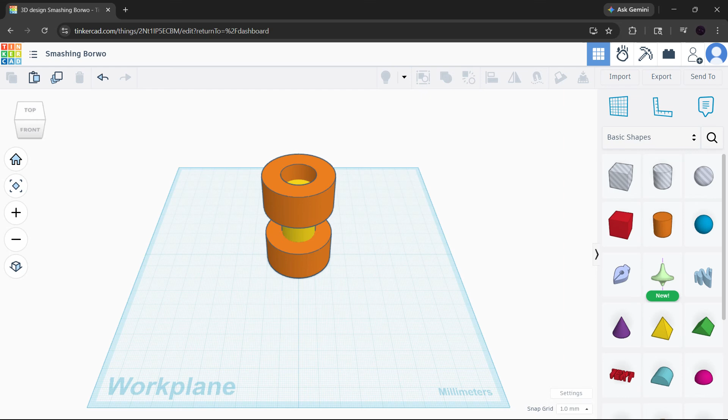Let's get into it. First, open your project in Tinkercad and think about the part you want to move. Whether it's a hinge, a swinging arm, a simple pin joint, or a rotating connector, the same rule applies. If two pieces are touching in your model, they will most likely fuse together when printed. That means you need clearance.

For most FDM 3D printers, a good starting point is to leave at least 0.4 millimeters of space between the pin and the hole. This tiny gap is what allows the parts to print separately and still move after printing. Now let's break that down. The pin is the part that moves, and the hole is the part that holds it. If the pin is too tight, the printed part will be stuck. If the hole is too small, the joint won't articulate at all.

So when you model these pieces, make the hole slightly larger than the pin. A 0.4 millimeter clearance is a practical minimum for many printers, but depending on your printer settings, filament type, and calibration, you may need to adjust that a little more or a little less.

To create the joint, start by modeling your main body parts in Tinkercad as usual. Build the base shapes first, then add the moving feature separately. For example, if you're making a hinge, model one side of the hinge on one object and the matching side on the other object. Then add a cylinder or a custom pin shape where the rotation point should be. On the other side, create the receiving hole, but make sure it is oversized enough to account for print tolerance. That extra space is what prevents the parts from locking together.

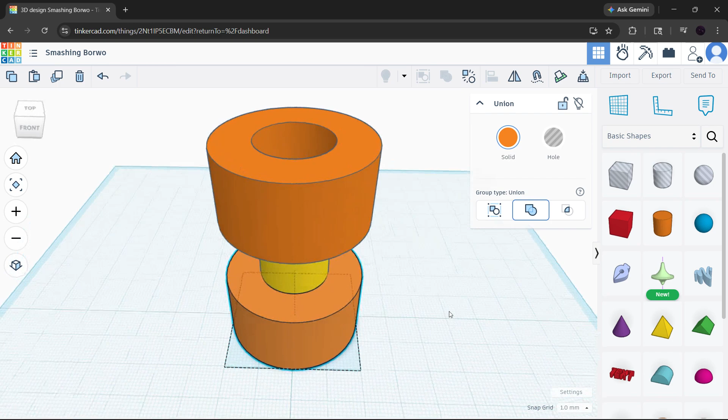If you don't want to build every connector from scratch, Tinkercad gives you a faster option. Go to Shapes, then open Hardware, and look for connectors. These are pre-designed parts made for 3D printing, and they already include the correct tolerances for movement. This is a huge time saver because you can use them as a starting point instead of guessing the dimensions yourself. It's especially helpful for beginners who want a reliable way to create joints without having to calculate every measurement manually.

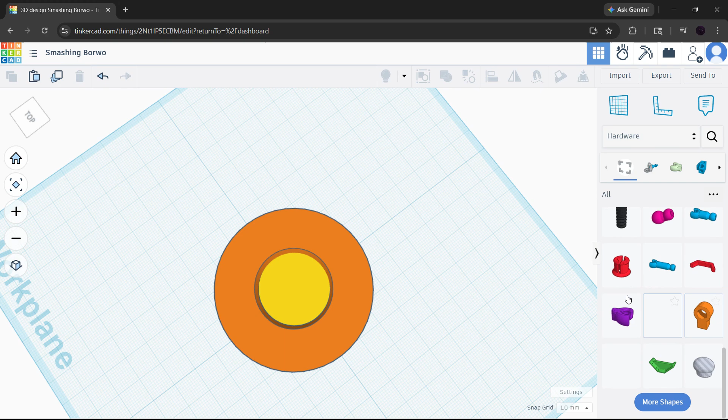Once you place a connector, position it carefully so it aligns with the parts you want to join. Use the work plane and alignment tools to make sure everything lines up cleanly. A misaligned pin or hole can cause the joint to bind, wobble, or fail completely after printing. So take your time here and zoom in if you need to. Good articulation depends on precision.

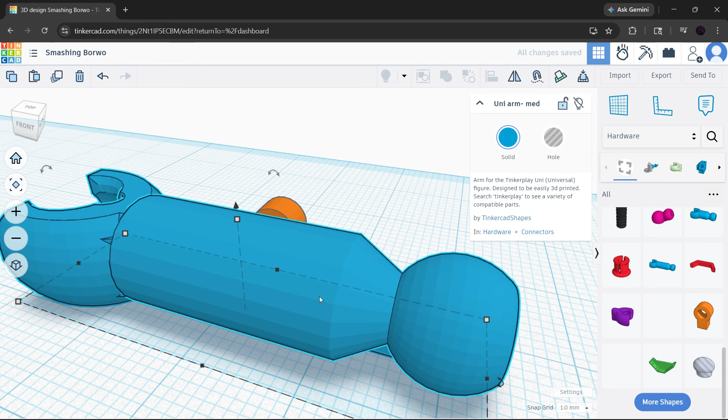Now there's one more step that can help you catch problems before you print. Use SimLab, which you can access from the Apple icon in Tinkercad. In SimLab, you can assign motion types like pivot or axle to your parts. This lets you test whether the joint behaves the way you expect. If the part spins correctly, swings smoothly, or rotates around the right point, then your design is on the right track. If it doesn't move properly in the simulation, that's your chance to go back and fix the spacing before wasting filament on a failed print.

Testing in simulation is important because even a design that looks perfect on screen may not print perfectly in the real world. Small errors add up fast in 3D printing. A gap that is too small can fuse. A gap that is too large can make the joint sloppy. So the goal is to find the sweet spot where the parts move freely but still feel sturdy.

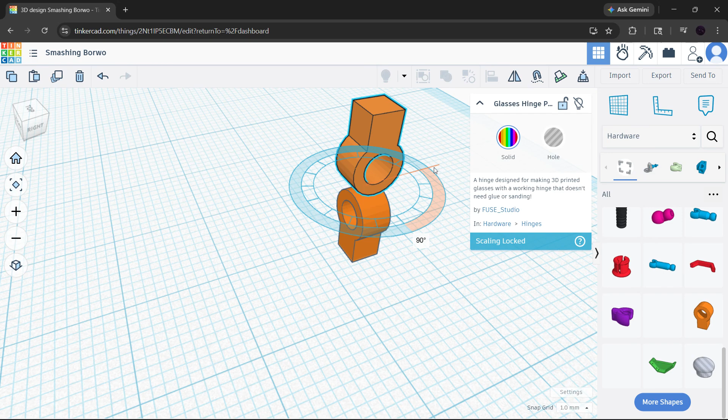Another helpful tip is to keep your moving parts simple whenever possible. The fewer complicated curves and tiny details you add to a joint, the easier it is to print successfully. Clean geometry, proper clearance, and careful alignment usually give the best results. If you're designing something like a functional toy, a mechanical arm, or a snap-fit connector, always think about how the printer will actually build each layer.

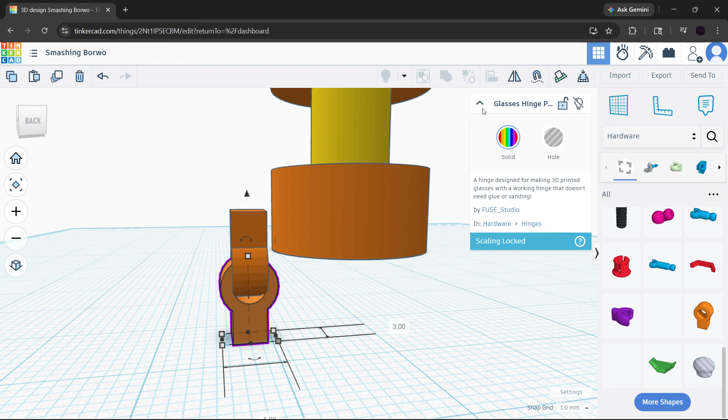So to recap, if you want to articulate parts in Tinkercad, start by planning your movement. Leave at least 0.4 millimeters of clearance between the pin and the hole, use the built-in hardware connectors when you want a faster solution, and test the motion in SimLab before printing. That combination will save you time, improve your print success rate, and help you make moving 3D models that actually work.